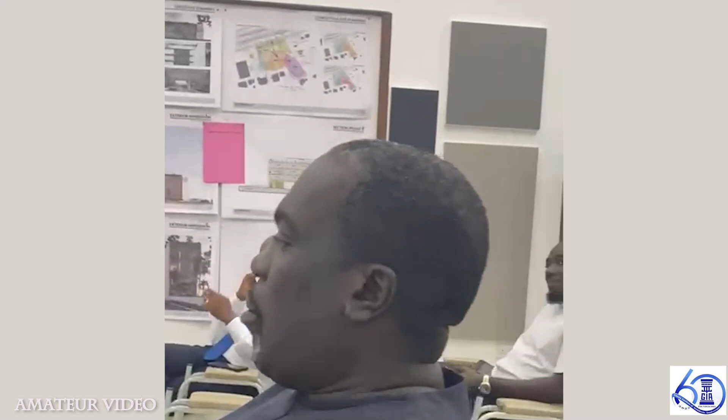Okay, so without much ado, we all know the reason why we are here. I'll call the competition coordinator to give us a brief overview or background to this competition, after which we'll go to the main object of the day. So let's welcome our competitions coordinator, Augustus Richardson.

Thank you very much, Mr. Secretary Fifi, and thank you all for making time to be here today. Indeed, it is a very proud moment as I stand in the very hall that we have all known for years, looking at what it is right now, through the efforts of so many members, and indeed all of us who contributed in one way or another to make sure this happens. So a round of applause.

I'd like to take the opportunity, maybe first of all, to say that I'm quite disappointed at the attendance as of now. I'm only going to blame it on Friday and people being busy and all that. We only knew the submissions as submission 1, 2, 3, 4, 5, 6, and 7. I say that because 9 submissions came, 2 were late. Another hallmark of what we are doing: if the time is 3 o'clock and you come at 3:01, we will not accept it. That's 3 or 4 competitions we did in my tenure.

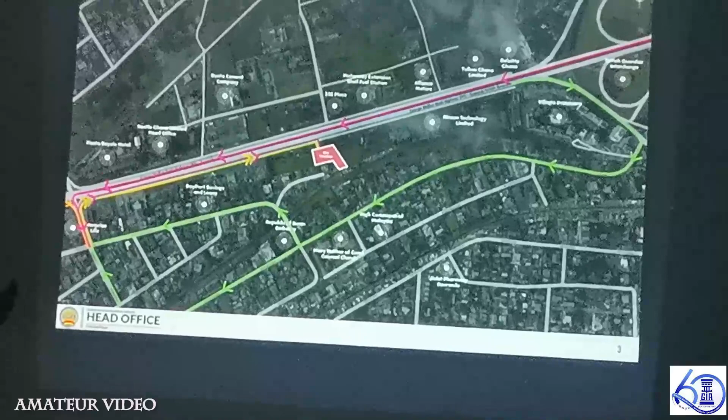And then the traffic, how to route traffic to the place. It's a whole subject for traffic impact assessment. Going forward, we need to do a study to make sure that all the properties along here can exit onto the N1 in alternative ways, because the planning needs that. I think in the permitting stage, we will have a precise plan put together for submission.

Having said that, we have deferred that thinking to another time, and this is the site and the access that comes from it. You will realize that the site slopes and brings all the rainfall down into the Jolu stream, which goes along here.

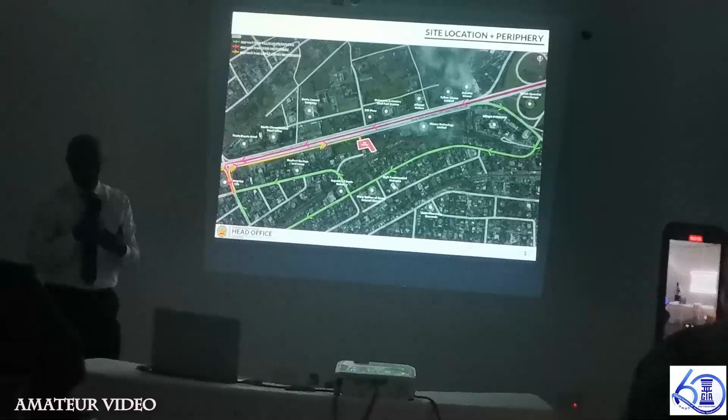So it's a very critical point about it. You will see on the client's topo study a water course that goes through there. We're very familiar with this location by Providence because we worked on 335, which is right opposite the site. That's 335 you see over there. And this whole stretch from here to here of the N1 floods seriously because of infractions in the water courses that are delivering water from the top down to the grade.

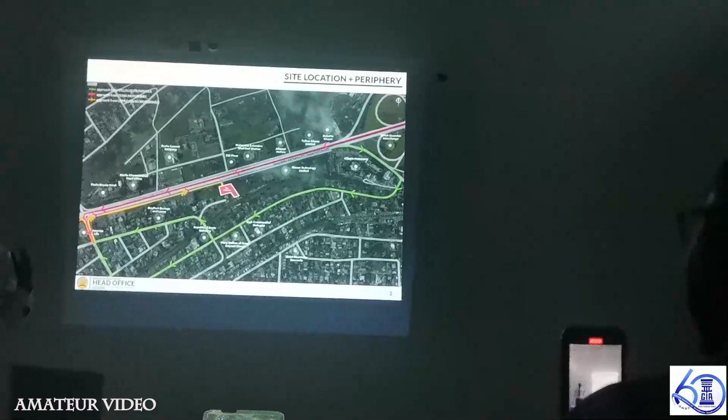So we sort of had a close-up look at this site. I think the president himself did a scheme for this site, also understands the terrain or not. Yeah, so it's not an easy site to get right. Apart from that, the client's requirement to have a phase 1 and phase 2 merging together into something was also something that brought us difficulties. So it's not an easy site.

Very close up to it. There are some sketches that give you a sense of how we intend to do this. My team struggled with how to get this thing done, and then I had to come in and say, this is the way it's going to go.

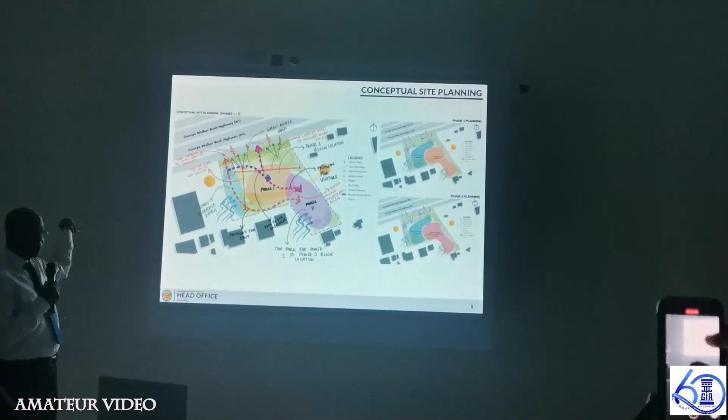And that's how we came back and saw the logic in the phase 1 and phase 2 and pathways and all these things. I don't want to go through them too much, but we understand that we have a north-facing advantage, so you can have some glass there, you can change the zone, and then the east and west. In every situation, sometimes you don't get so lucky. 335 was the same, it had a south facade, and so you have a good road coming on N1 and all that.

So all these advantages and disadvantages as well informed the way we were supposed to go about this. I'll just run through.

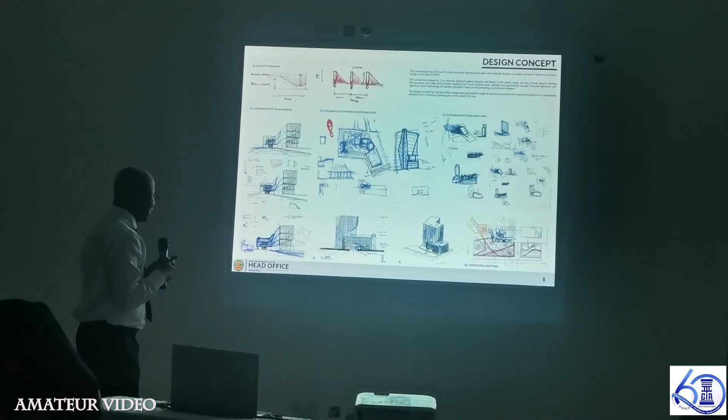There are these sketches. When questions come up, I'll leave members of my team to make comments on this. But they are conceptual, and they lead us to the shape of the building, to how the curve which symbolizes the play between your physical strength and your financial strength came about - a great idea from one of my colleagues, Okobi, who came and talked about this, which informed the curve that you see on the side. They know I like curves on the sides, and if you're going to pick this thing up, I put a curve on the side many times.

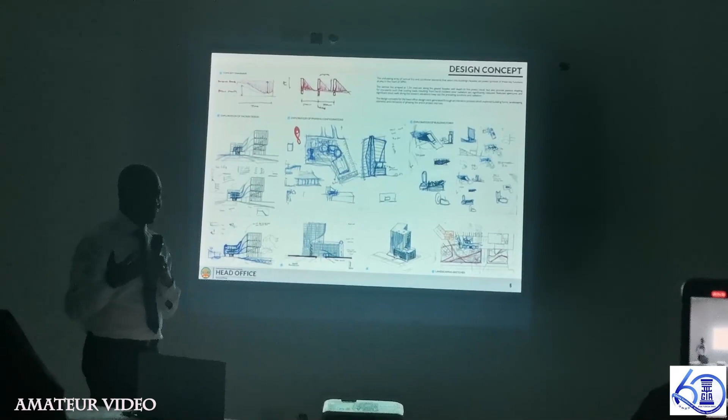So they will talk about that. But it was developed and had a strength to remind people of pensions - the idea that you must always be thinking of pensions when you have strength, and putting money away so that you can have financial strength in the future.

This was really the difficult part of the scheme: how to build phase 1 and get the cores of both buildings to merge, and then get a tower out of it for commercial purposes. But the sketches here are there for you to see. As you look at it, you'll see that you needed to give phase 1 a certain length of facade, so it informs the shape that we have there.

If you look at this here, it informs that shape. And then there's a parking lot there, which has the advantage of climbing the tower from there and merging the core, and getting traffic onto the parking levels, and being able to get basement access.

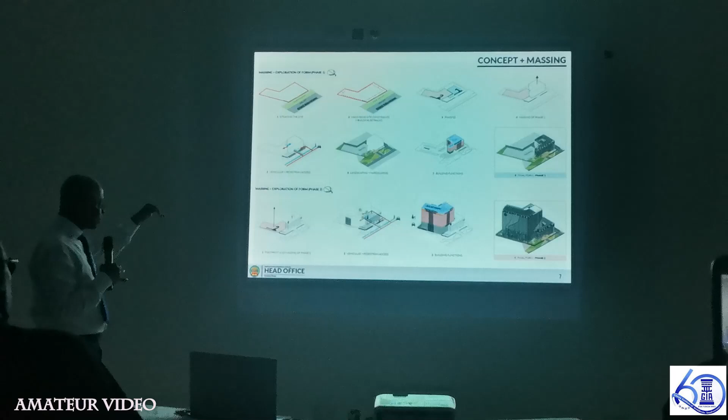All these factors have to come together to bring a solution that works. They are very, very sensitive. And then the core design itself.

I have seen some very bad cores designed, and it's at the heart of any office building, any multi-story building. You've got to get this right from the very get-go, making sure that the vertical transport is adequate, the vertical services, staircase pressurization, power.

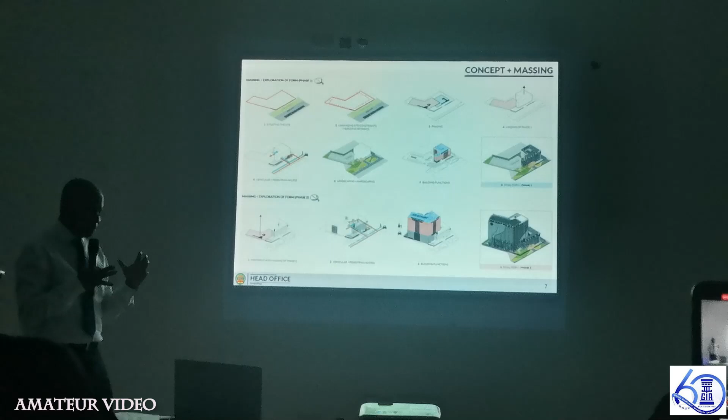Refrigerant, condensation, all that fits into the core. And then getting the core to be as accessible and out of the way, such that you harvest daylight for tasks. So ideally the core must be in the heart, and then you put people in the daylight areas, and try to catch all four sides.

Except for phase one, where we know we're going to attach, so we're looking at it from that. So these are the points that informed the site. And so this is what came up.

Phase one then stretches that way to give certain latitude to the project. So if it takes them 5-10 years, they still have a stately building which fronts N1. We needed to be careful about the easements, especially on the front.

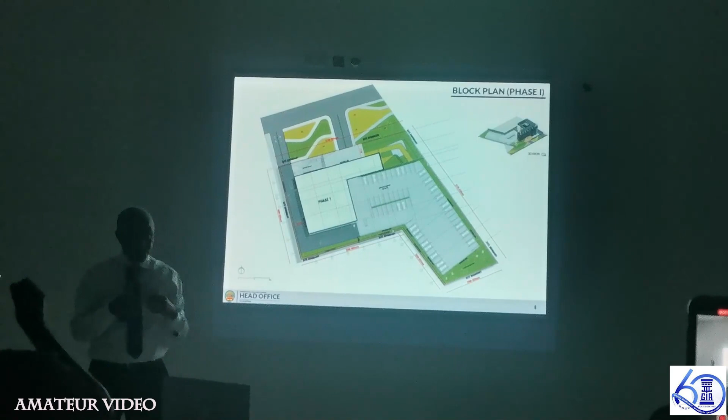There's frontal access and exit, and it goes through, and you have parking for phase one. You also have basement access, and phase one is good. Then you kind of realize about parking 5 years, 10 years from now, it goes up at the top. And it works very well.

And you merge the cores, and you merge the receptions, and so on. It works very well that way. But not an easy thing to put together, because the brief is very, very challenging, and the shape of the very site itself.

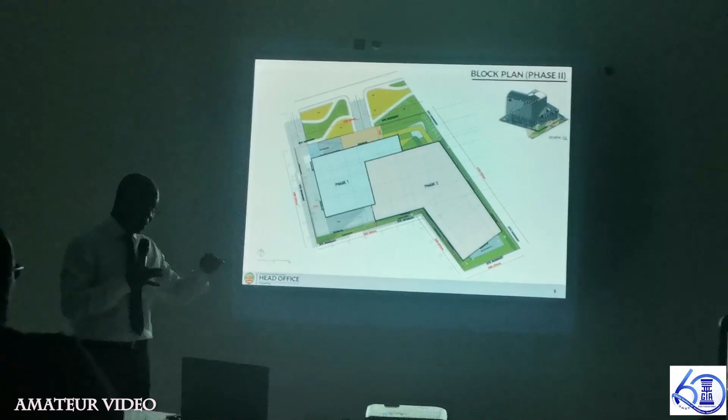And so one of the things that is most important is getting the structured parking, the ramps to go around the core, and sort of rhyming that with the entrances.

At every level, as you spiral, you must hit certain door levels at a certain location. So when you go to section, you know that at this level you're entering the core, at this level you're entering the core. So all that, of course, further refining will go on.

So that level, this is the basement, phase 1's basement. You come in, they will have the usual cells. Those are shuttle lifts that take you from the basement to the ground floor.

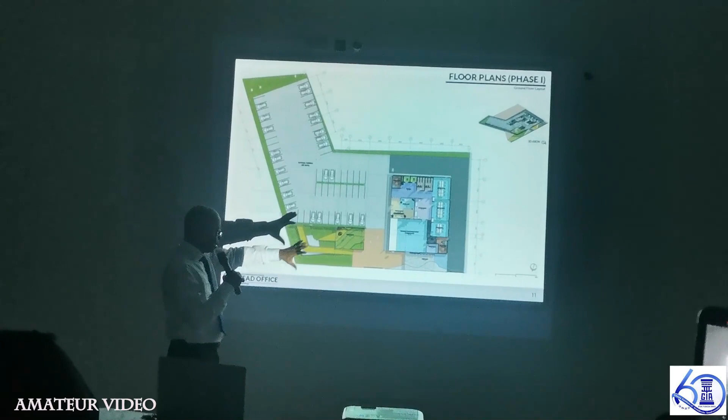And then following up, phase one looks very simple. It has a good reception there. It has a core, wet services, a staircase area.

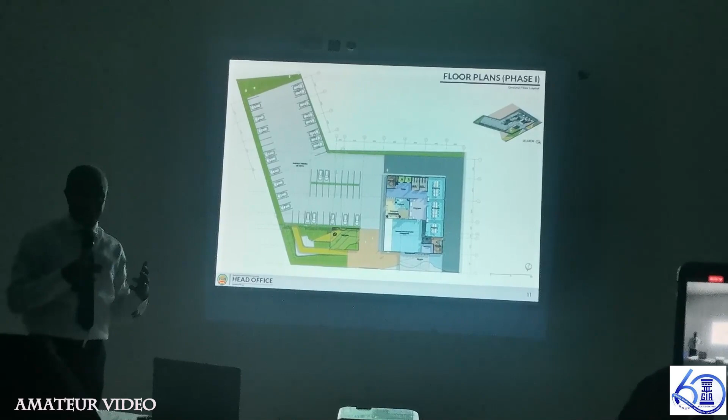Having said that, after a competition, there's always a re-engagement, and you basically start to redesign the problem, even though the concepts stay. So all this will form the beginning as the basis of further design. It might stay, it might not. So you've got the ground floor, the access here.

We've got an entrance garden here, which is very important for me to set the mind of the entrance to a very soft and quiet, and then there's a parking on that side. All the spaces I talked about.

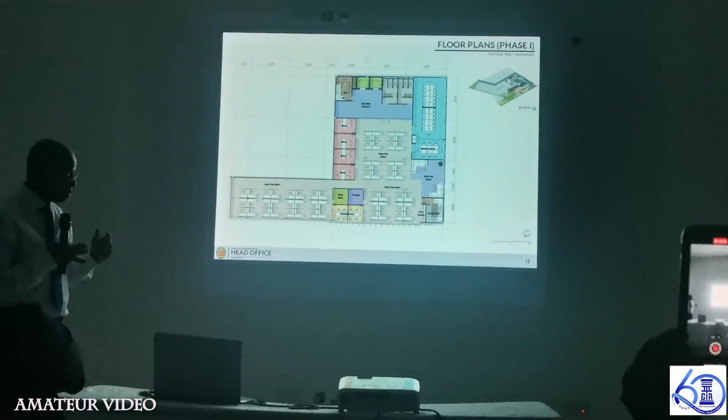Then you get to the proper floors themselves. In office design in this country, there is always a toss-up between the cellular office and the open plan office. While out there, outside of this country, in the developed world, people are moving away from cellular offices, and there's a whole trend.

I've actually designed offices in the Tigo office building, where at the end of it, the CEO took his office and said, take it away, I want to sit with my people. And we have done a very elaborate office with him. So that trend, corporate worldwide, is more open plan, interactive space, collaborative space, and so on.

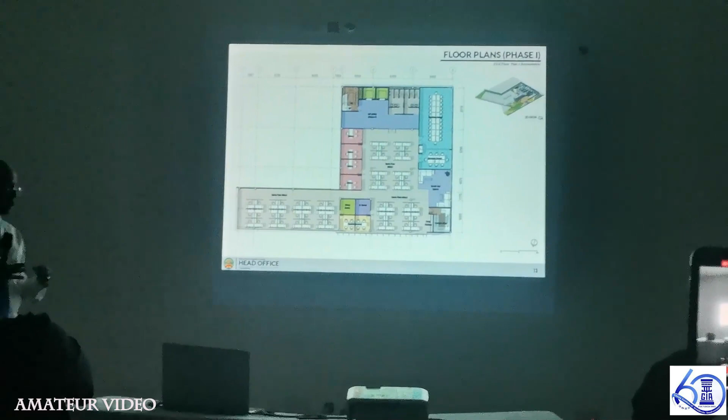When you come here, people are very sensitive, especially in public services and so on. People are very territorial and hierarchical and so on. So in our re-engagement in most of these offices, we need to tease out and also educate them the value of it. So what we have done here is a fair split between cellular offices and open plan offices, which we are going to.

We started a space planning interview process where we field a questionnaire survey to them and fill it out. We study the organogram, we interact from department to department and make sure that they feel that the building is theirs. We get the questionnaires back, input into a revised stage 2 design, and go back and interact with them. By the end of the process, they checked out on everything and they're happy to go ahead and work with that. We may end up with this balance of cellular offices and, from our experience in the past, open plan offices.

So that's phase 1. Similarly, over here we concentrated on more cellular options, but some open plan, looking at the balance in how we're going to go forward. But this will clearly be validated by the re-engagement we're going to do.

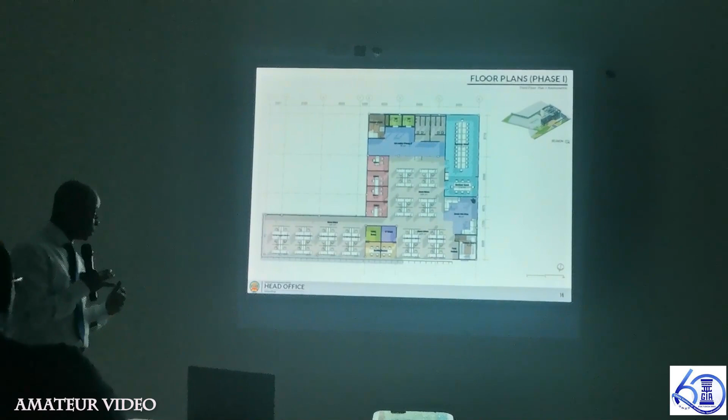So you've got these floors and then you go to the roof where there are these services. We're going to test the extent to which these services, these facilities, are going to be sampled by them. There's a gym, there's the catering, cafeteria section, all those services that are in the brief, but as you design, you want them to recommit and look at the resizing of it properly. So as it looks now, it looks great for their needs, but we're going to test that with pure interaction and sign off before we go into documentation for tender.

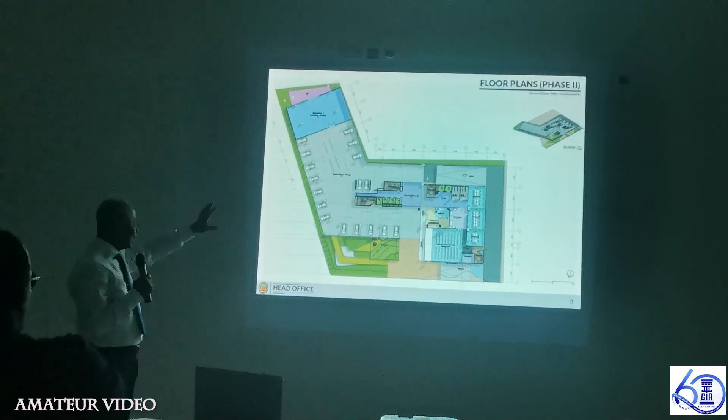So I think by and large we have phase 1 covered. Now we're looking at phase 2, where we have cannibalized the parking lot and put a tower there. It has the ground floor. There is no basement under the tower.

You've got to think structurally about how you put a tower next to a current building. If we had done the tower before the smaller building, that wouldn't be a problem. But now we're doing the smaller building and we're going to go deeper in foundations, and those discussions we had structurally were about how to extend columns, setbacks, and so on. So all that we have done here takes into account that interfacing when the time comes for that to go on.

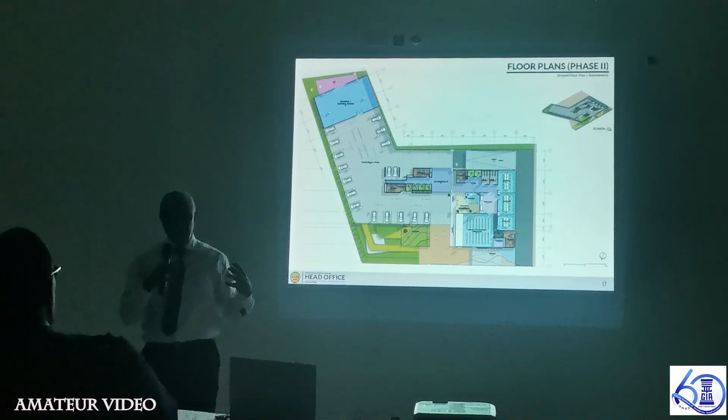So you have a very important part of the tower, which is the core, which relates to this core. This link there is very important—how we merge two links and get the reception to merge them. So on this you have the parking, you've got the core, and then you start to travel up by going.

There's a ramp that takes you up onto the upper floors for the parking. So the next floor here is the parking level. You keep going up. This is the first floor plan as well—it's parking. The important thing is this ramping that makes sure this is parking on a slope, a trick that we use and it works.

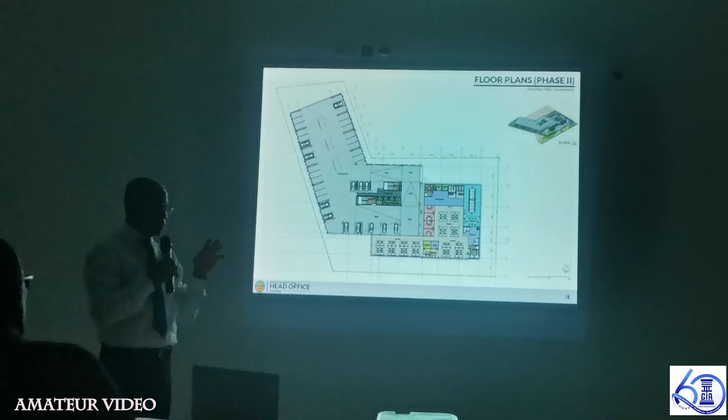The core design is important—the staircase pressurization, these spaces that are for fire protection, to make sure that smoke doesn't enter the staircases if there is a fire, so people can escape. To me, the biggest test of any office building's success is the core design, and all your engineers will weigh into it and make sure that it works before you move ahead on the next step. So that is the core that we stand by in all its aspects.

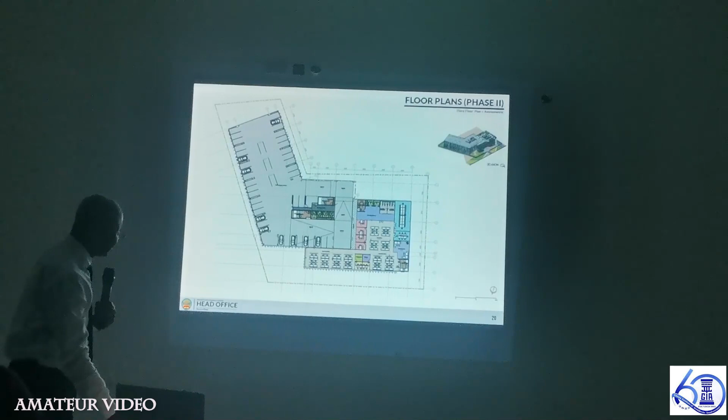It works very well. So you've got the parking levels until you get to the office level. It keeps going—this is the third floor. Then we get to the office, typical office. So this is the fourth floor, and then the fifth floor, the office starts: open plan, typical office floor, open plan with a core.

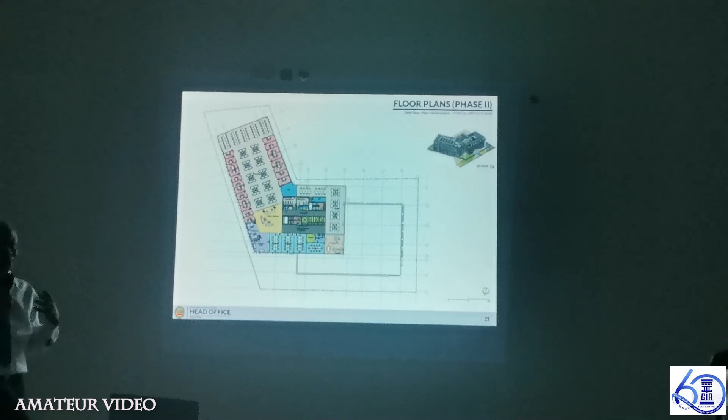Now you need to look at how we do a typical space planning of it. This layout is doing the counter thing, which is putting the cellular offices on the windows side so that the big men, or those who have the right for cellular offices, can have them there.

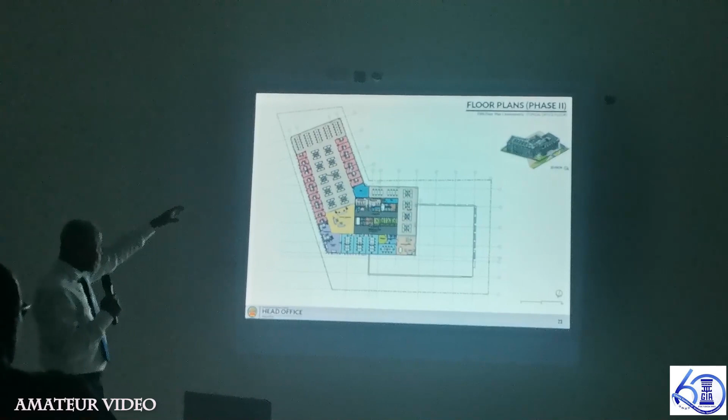Typically, what we do is try to put the shop floor guys near the windows, create very nice layouts for them, and then put the cellular offices around the core. The shape of this building is such that we have a very long length of windows, so you can have lots of cellular offices on the windows and still have open plan offices with meeting rooms that also have the joy of daylighting. This is just one typical way.

We're going to test these layouts, and we're going to work with the organogram and make sure that every department is happy with the location and the layout, the space planning that they have. So that process is what we're validating. We simply put this typical layout there for...

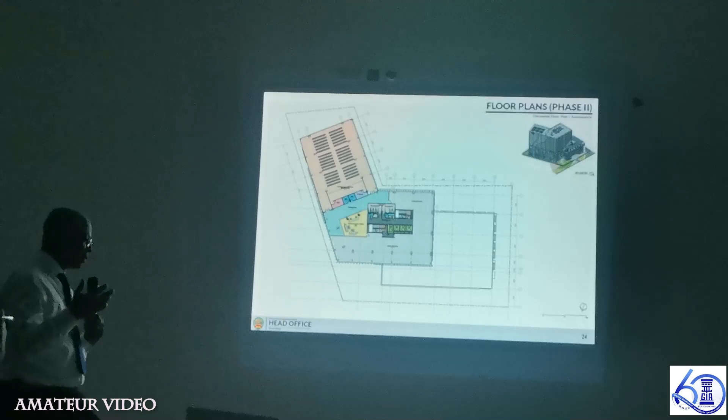...to illustrate the density, the occupancy density, which is about 8.1 persons per square meter - sorry, 8.1 square meters per person, which relates to the total floor area that we have, and then it runs into the budgets. So the top floor, we have the auditorium, training facilities, etc.

And then we have the services. You've got to leave plant space. Plant space on the top, cafeteria. Sorry, the level below has...

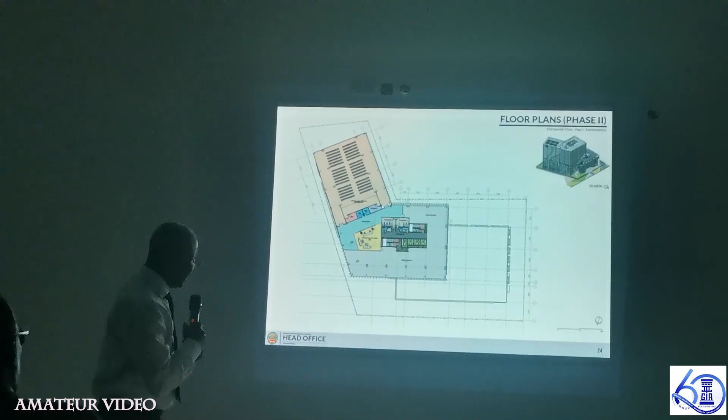Go back. This is also open plan seating offices, possibility for multifunctional use. Then moving up from this is where you have the cafeteria. The cafeteria leaves room for services, and then tries to look out on the N1 and the open areas there.

And then you go to the gym. This is an oversized gym. We're going to test it and make sure that they are happy to have a size of the gym like this when the time comes.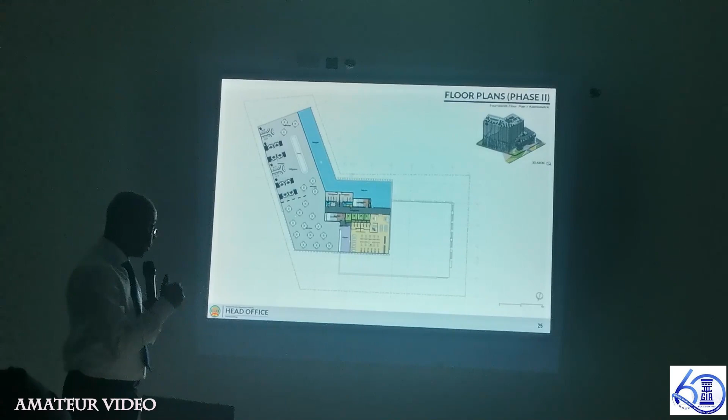But in the end, being a commercial property, this is probably going to have the dictates of the commercial market, and so the brief for this will not necessarily be NPRA's brief, it will be what the market will require. If NPRA grows, it will only go into a small part of the tower.

So here we are with some sections through phase two. I haven't talked about the roof that comes over the cafeteria levels - that's where you have the solar panels. You've got an entire roof with the PVs, and that's what's over the cafeteria.

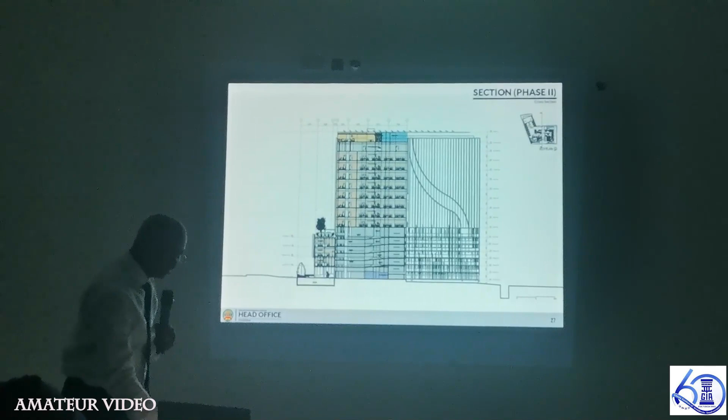Sections through the tower. I think I'm coming to the close of my presentation. You've got a sectional perspective that gives you a sense of how phase one looks like. One of the things we do is to give you a key plan there which orients it. If you have time and you look at the drawings, it helps you very quickly to orient yourself.

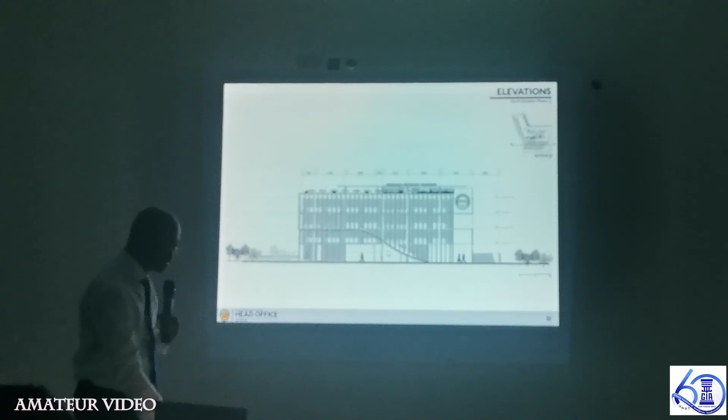And so, elevations - the curve keeps appearing, reminding you of financial stability in relation to physical stability, financial strength in relation to physical strength. The curve which reminds you of your pensions. And so these are various elevations.

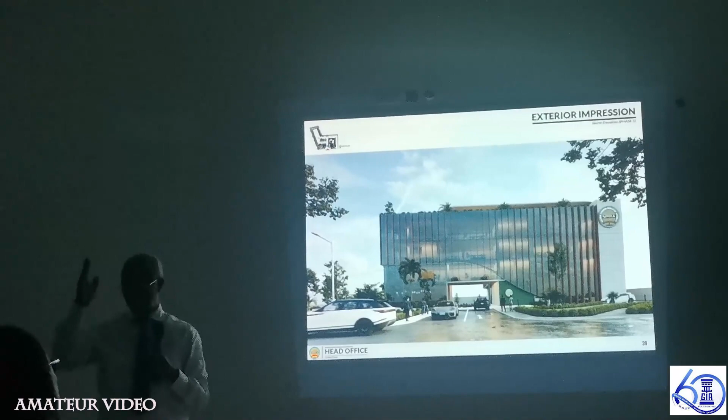So, I think I've spoken enough. I would like my team to very quickly - 5 minutes. The gentleman must have been in the next one. So we'll start, talk a bit about conceptual aspects, anything I've left out. And then Julius, who joined Multicad just this year, is doing very well, and he's going to do the interiors because he did very good work on the interiors. With good guidance, he's got a very good soft touch to this. So we'll go over to you. Come on.

Good evening, everyone. So I'll be very brief but succinct. I think Mr. has said pretty much all of it, but what I can add is one of the key considerations we had was shading.

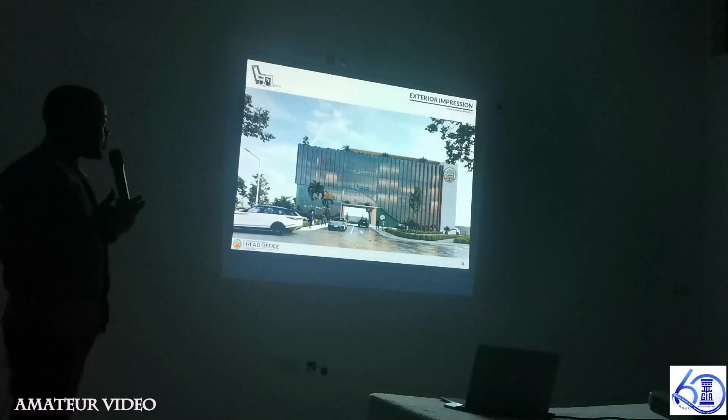We know the issues we have with the heat in our offices, especially because of where we're located in NPRA. So one of the strategies we employed was the use of vertical shading, and these were strategically positioned, especially at the eastern facade and also the west, to help shield from the sunlight and solar ingress that comes into the office throughout the day.

So the visuals, as you've seen, also try to orient the viewers as to how phase 1 and phase 2 integrate with each other. As you saw before, it was just phase 1, and now we see phase 2 behind. And this is a view from further back, showing phase 1 and phase 2 together.

This is a view from the northwest, and from the northeast.

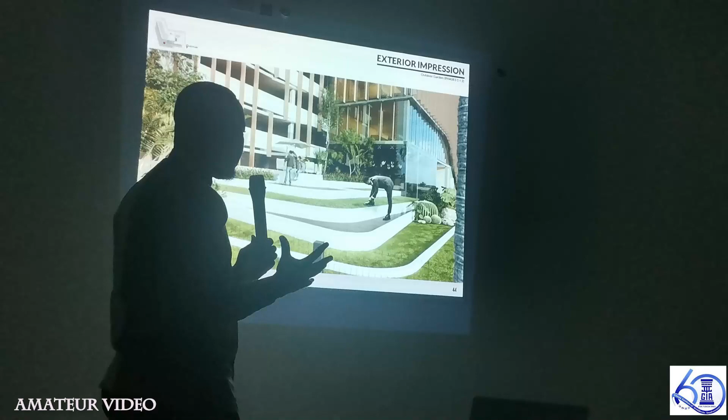And this is just capturing the landscaping that we have upon entry, as Mr. Ifod mentioned, just to create the ambience for the users and also for visitors. This is a close-up of the interior, the outdoor garden upon entry.

And I think I'll let Julius quickly talk about the interiors, and then we'll quickly move to the regional head office.

Thank you. Good evening. So for the interior spaces, basically the idea was that we'll maintain the story we're telling on the exterior space. So with the curves and the graph, we wanted that to be throughout the interior space.

We decided to also settle for neutral colors that would calm down the nerves of whoever is coming, especially because pensioners obviously are stressed enough about their money. The idea that they can come to a space where they are sure that their money is going to be taken care of, and to be in a space that relaxes them, already gives them the mentality that this is a firm or company we can actually entrust our money into. So that's basically the idea.

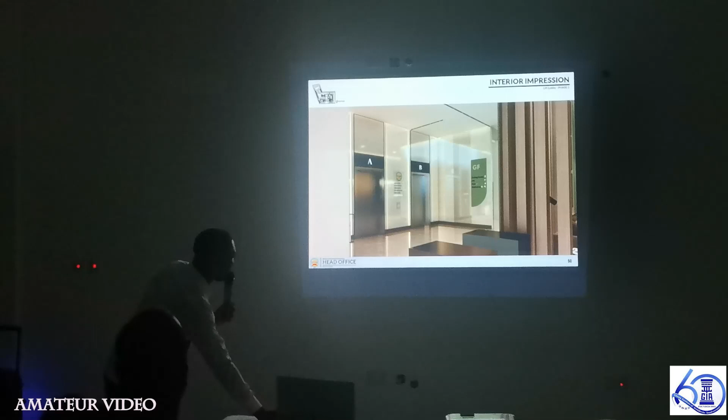So for the lift lobby, we're also looking at very light, very gentle colors, not too harsh, but that are appealing as well. Neutrality as well.

This was the prototypical office block for the NPRA, and they intend to have one of each in all the regions across the country.

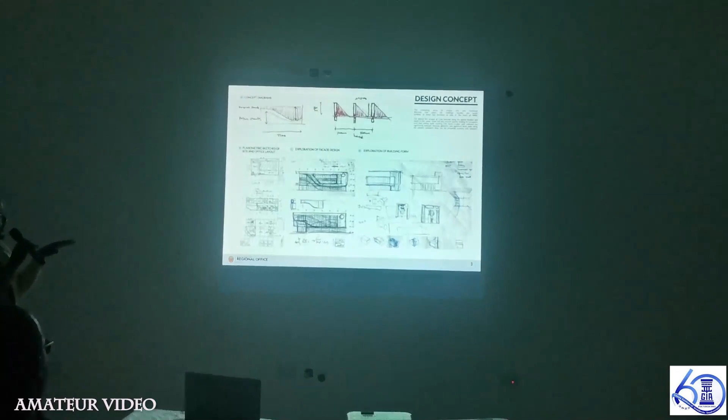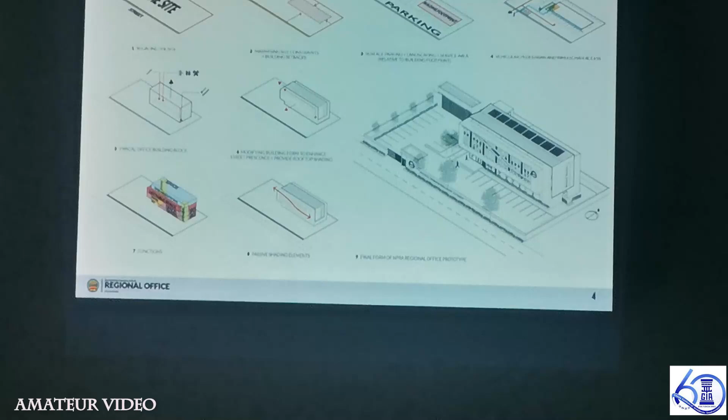So these basically capture the conceptual massing behind the building. As you can see at the top, we basically plan out how the site will be organized, a service area where the office will be located, identifying the different accesses. So that's on the top right.

So we have identification of the different accesses for wheelchair, PWDs, people with disabilities, for pedestrians and also for vehicles. And then we have an office, typical office block, which we basically extrude, and then the various design elements come in to form the rest.

So we have the roof that frames or covers the rooftop, which is actually one of the potential revenue generators for the office, for this regional office, which was also part of the requirements. And then we have a function to capture the bottom left as well.

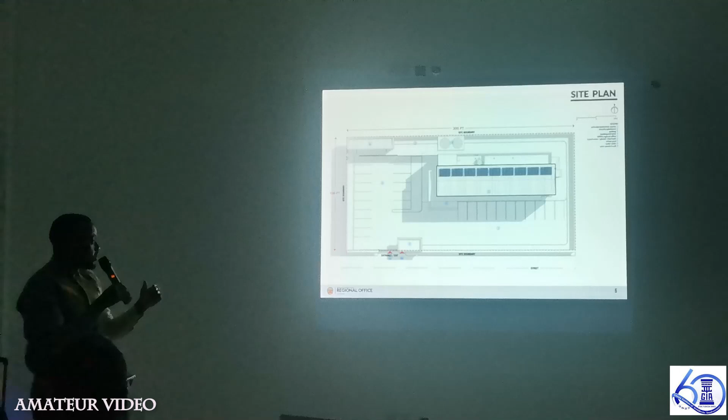So one key thing is that the building is oriented with the longer side facing north-south, so that we were able to harness as much daylight throughout the day for the office spaces. And on the south facade where we had a lot of glazing, we employed the use of vertical shades to keep out a significant amount of solar ingress.

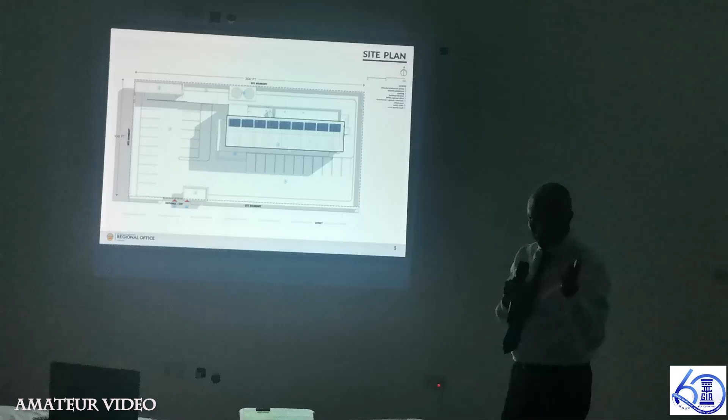Yeah, so this is no site constraints, the ideal situation. There will clearly be sites that we have to do a lot in order to make the concept spoken of already work.

This is the west facade with adequate cantilevers for shading as well. This is the east facade.

And then this is a sectional perspective just to give a sense of the building in section. We can see the double height section at the bottom left, the level space above that, and then the rooftop space also. Another sectional perspective.

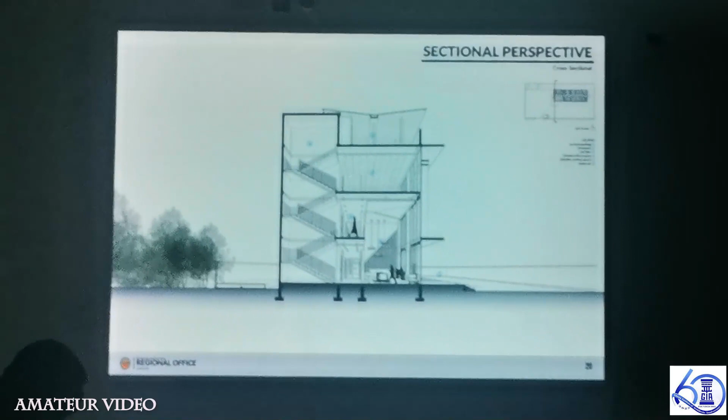Basically, the idea is to create a design, or a visualization that wasn't so imposing on the viewer, has soft touches so that it's not overwhelming, let me say. But in that simplicity, the attention to detail as well would bring out its beauty, its aesthetic.

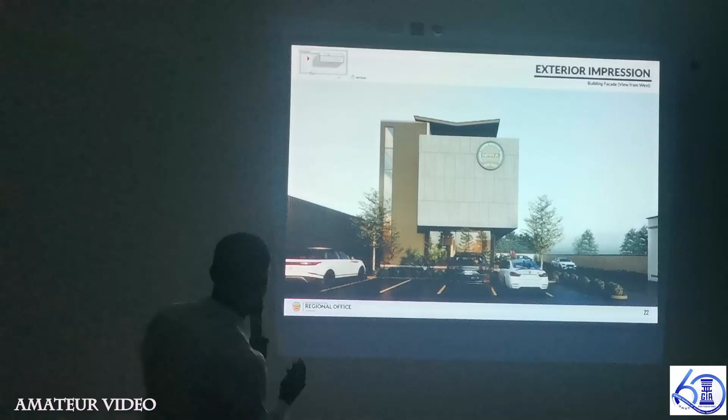So then we can see, we can appreciate the glass glazing, basically how effectively the shading is working. So then this is the other facade, basically, with a shot of parking spaces and landscaping.

And then the shots from the southeastern side, southeastern vista. And then from the southwestern side.

And then we have an aerial. We also wanted to obviously harness the potential of the sun, so then we decided to have solar panels. So then another aerial.

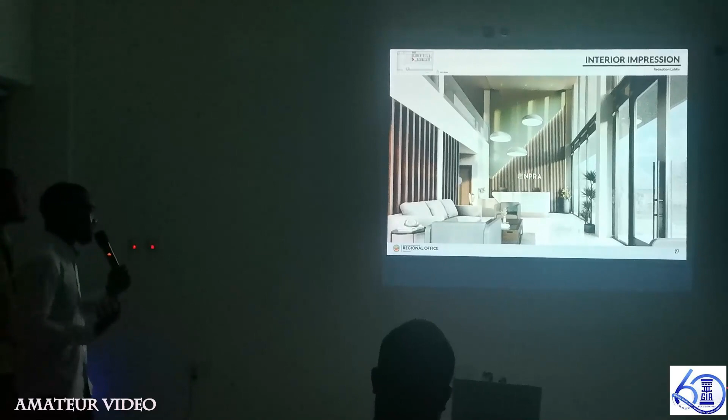We have a lot of daylight in the space. So the volume of the space and lighting creates a sort of an uplifting feeling when you enter the space, and that's exactly what we're going for.

So then we have a shot facing the entryway. And this is a shot from the top, so on the first floor, looking down at the reception area. And then now the manager's office.

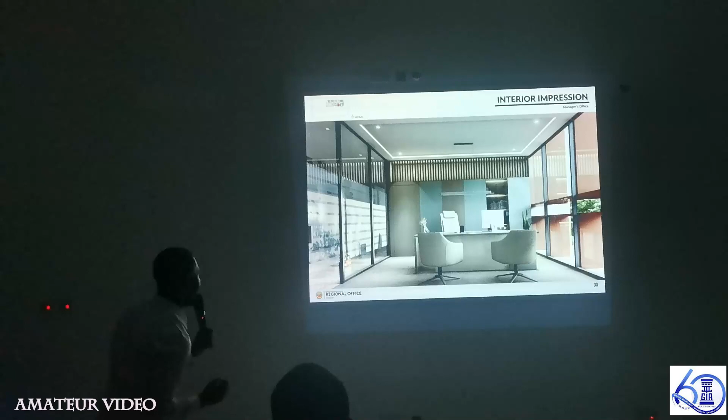The manager's office, we still maintain soft subtle colors. You can see our shading elements there and how our shading is blocking out a lot of heat and sun, but still keeping it as illuminated as possible. And then the view in the manager's office facing the seating area.

And sort of an aerial of the manager's office. Another shot facing the seating. Yeah, and that's it. Thank you very much.

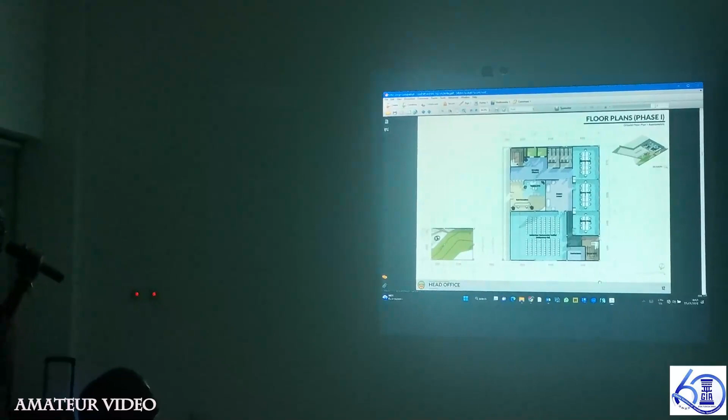In the presentation, I was trying to say that the location of the core - you have a building which in phase one is an L shape, and then the core is located at one end of the L. So it brings us a lot of circulation.

If you go to the next floor plan, you realize that everybody else on this arm of the L, we are having to introduce a long corridor walkway - even though by your open plan it doesn't make it obviously a walkway, but it is a walkway - to have to go all the way to where our stairs and lifts will be. So yes, I rightfully say that the design of a core, if you get it right, is the major part of an office design.

The flow in the core itself, I love it. Its position vis-a-vis the rest of the floor plan, I find that it brings us into a lot of circulation. To everybody else down there, yes, you could use the escape stair to your bottom right corner, but there's no lift provision there.

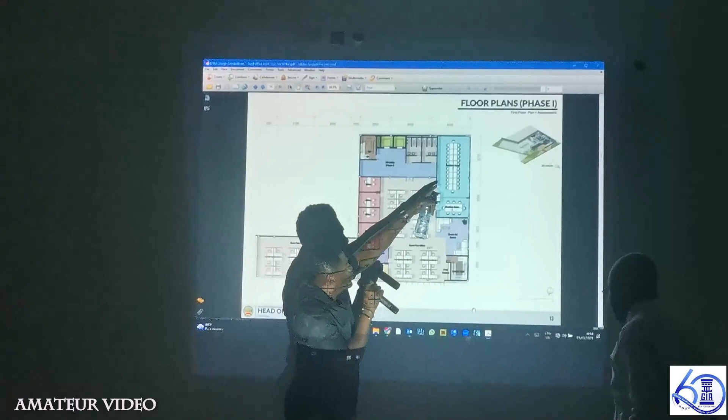And then the circulation space in front of the stair and lift, the proportion of it carried on each floor - if you look at it, to either end of that circulation space is leading nowhere, and we could have been spared space. I'm looking at, let's say, towards here or towards here. So it's like a huge circulation space carried on each floor. The design of the washroom, for me, in office design, robs us of any daylight, even though we are on a perimeter, because you put your ducts to the outer perimeter.

So I would have thought that if we reworked so that the washrooms have their duct internally, then on each washroom floor you could have also gained daylight into the space. But because of the way it's worked out, your duct is your perimeter wall, so no daylight, or not much daylight, could possibly be coming in.

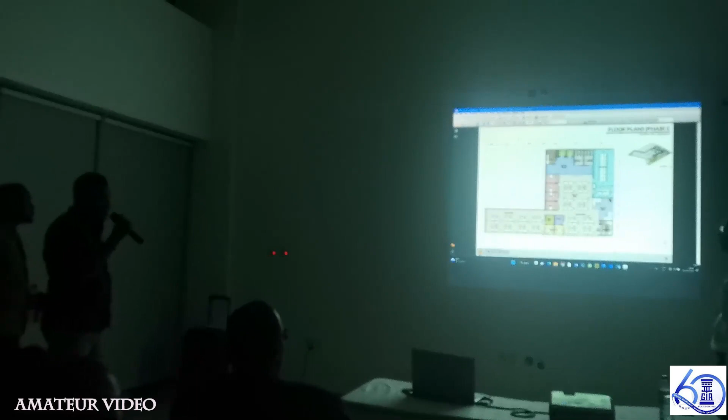Okay, then possibly on each floor as well, could there have been a kitchenette of a sort, knowing how our food habits are on each floor? This is a 3-story, okay, with the cafeteria sitting at the top. But let me answer the other, or maybe I go through.

So on this floor plan, it was mainly for me the circulation and then the location of the core vis-a-vis the rest of the floor. But if as phase 2 starts coming in, I kind of think that yes. Okay, the one before this, the floor plan just before this. No, okay, maybe it's that one.

So what I feel is phase 2, especially this part of phase 2, if you look at, is this your ground floor? Yes, the ground floor, and then the subsequent floors. I think the determination of this span is very effective on the office floors, but I find it wasteful on the parking floors, because it suddenly gives you a very huge space where nothing can be done there.

So it's very possible that what could have been done is, on your lower floors where it was being used for parking, the sizing of that width ought to have been optimal for parking—so if it's a car, 6 meters, if it's circulation, 7 meters or whatever, another car, that ought to have been the decision to size it. Then when you get to the upper floors, you open out to optimize office space, but on the floor plans used as car park, it's certainly not optimal, and there's a lot of space there that could have been done a little better.

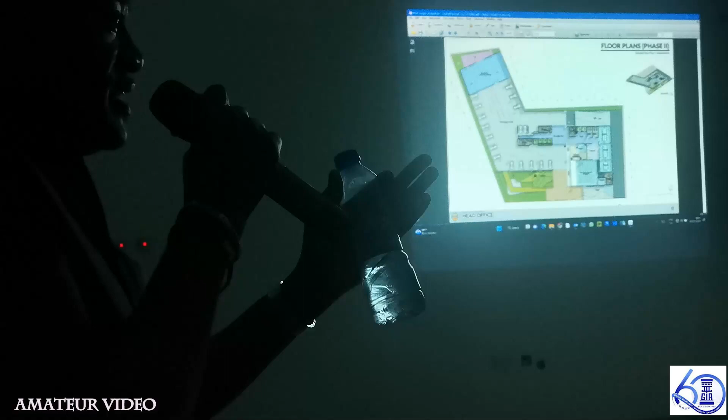Still on phase 2, the elevation—I find it a very exciting elevation. I'm just thinking that for where it is in Dzorwulu, or that part of town, maybe signage and things that could have been seen from many places could have been very helpful. I see there's the attempt at signage on phase 1, which is fine, but given the height you gain when phase 2 comes, I think it gives a brilliant opportunity for the skyline to have something of a signage in there.

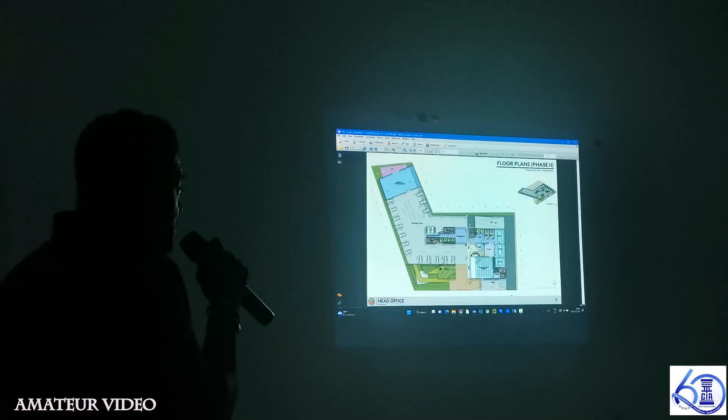I think this will be my comments basically, but let me say I'm very excited with the presentation. I've looked at some of the other presentations, even sheet sizing, the consistency of it and all of that—very nicely put together. Rendering quality, as I said, quality of floor plans is something I take note of, because even from my office, sometimes we get very exciting elevations, but the floor plans don't have excitement. But all your floor plans with the furniture and the kind of renderings seem to be really exciting. So congratulations once again.

What you have commented, I've taken some notes. You will realize that in a design of this shape of site, there are trade-offs. The grid—in any multi-story project you start with a grid, and for certain economic reasons at the top, you maintain the same grid downstairs. So there are these trade-offs that inform your design as you develop, and they come to you as you go on, and you trade off.

As we go further into design, when costs come up, perhaps we'll look at whether there are any other ways of mitigating some of these observations. Now, the linking of the cores drives the position of that phase one core there, and it's a trade-off. We took clear travel distances into account.

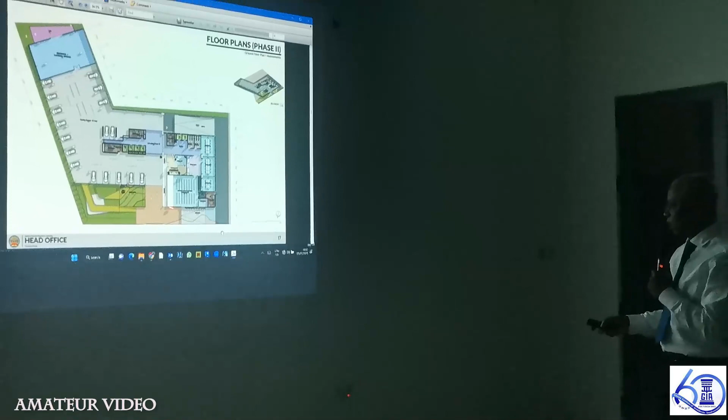Oh okay, all right, that's great. Thanks. We took travel distance relationships to be able to do this configuration. Yes, it might seem like a long walk, but if you look at the travel distance, it's actually a small building, really.

Perhaps something will come out with that. President, I forgot one thing. It's about the floor-to-floor height. The sections, can we see the section?

I kind of thought I saw something on that. No problem. Maybe the sectional elevation, yeah, the sectional elevation. The sectional perspective, any of them. Oh okay, not the sectional perspective, the sectional elevation. The section, the section is off. That's it, yeah, this one, or any of them. What's the floor to floor?

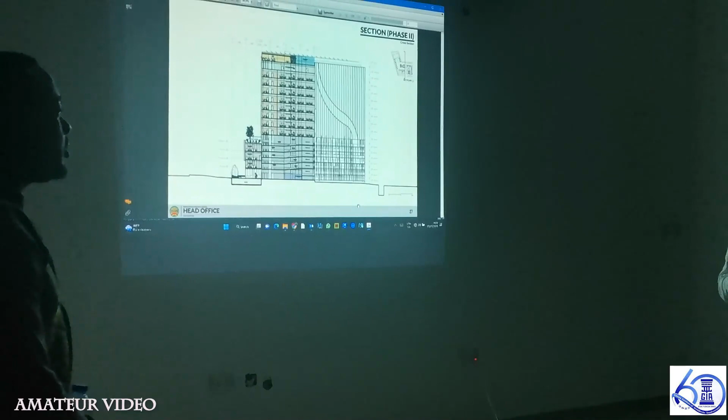Ground floor is about 4.2, and then the other floors are, what, 3.9. Is it floor to floor, 3.9? Okay.

We always work within that range because we have raised access floors. So this section is taking the levels for the parking. The parking is 2.85, smaller. Okay, so that was the question.

So in the parking, because when I look at phase 2, it seems tied floor to phase 1. The parking, don't forget, is a spiral parking, so it runs along it. The only time it coincides with phase 1 is when the cores merge. And the travel of the parking is on its own trajectory because of the spiral.

I was just very curious, because I thought that if we're doing a 3-point-something, which is fine for office, but then gives you suddenly too long a ramp for... that's different.

Okay, then the other comment about the restroom areas, and Oku came to me well after the competition and said we need to look at the handicapped situation. Moving into design, we're looking at all these things, and we've taken some notes. We'll ensure that these things come up.

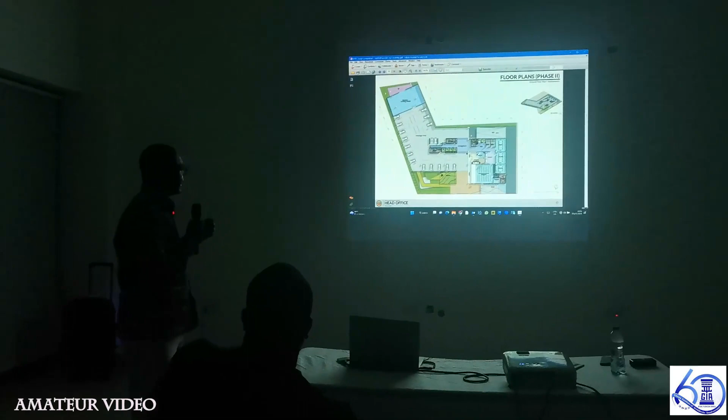Great work, but let me ask, if you can go to the second floor, wherever you have the cellular packages for phase 2. Okay, all right, okay. Well, I don't know the time, but I think that having all these cellular offices here and those here...

And having these cellular offices here and there blocks the natural light that comes in. And the fit-out, if you go to our fit-out, we've done it now, you realize that the principle we do all the time is that all those walls are glazed walls, and you filter light into the corridors, so there is a certain level of daylighting that gets into this open plan space.

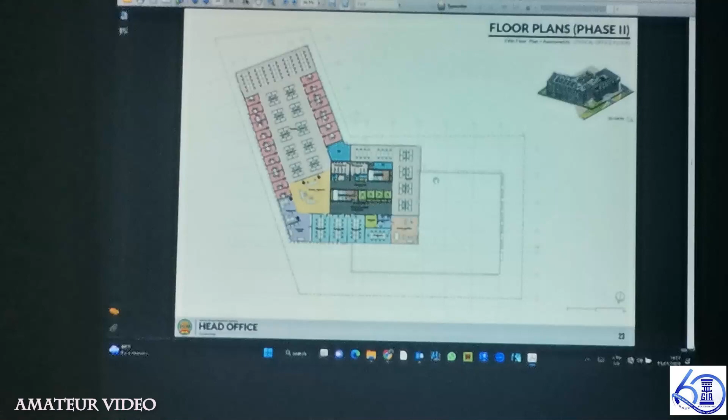Okay, so I was thinking, that is fine, but in addition, is it possible to throw in light wells from the rooftop, so that wherever you have this... because if it is going to filter through this, by the time it gets here, it is reduced. If it's going to filter through this, by the time it gets here, it is reduced. There will be some supplementary.

The light will take up a certain volume of space that will kill the occupancy level targets that you want to have. And maybe not a wall like a column-like wall, but...

To have glass block on the floors. So you chop it like that, and then from the top it comes - you have your skylight on top, and then it filters through. It's an idea to try. There's a software we use in Revit, when we cut out the building to show light into it.

We would use that to sense that a light well in this location might bring a certain level of lighting. But having said that, my concern is how the planning, the space planning, the furniture, and so on - once you take a shaft through it. So it wouldn't be a shaft.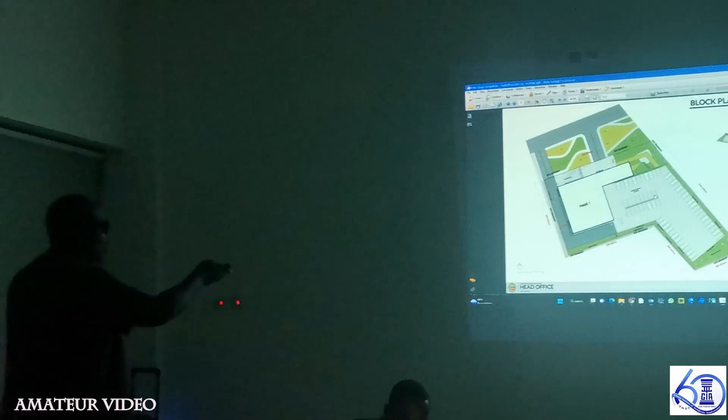We realized that, like you said, President Foster had said he worked on this site before, and what was remarkable about the site was that it didn't pond when it rained. I was like, that's interesting. So as we walked the site, we realized there's actually, currently on site, a huge drain built by, I don't know whether it's government, but infrastructure built all the way to carry water from that side all the way to the drain at the back. That drain at the back is going nowhere - this is a natural course that runs even underneath the Bellagio and so on.

So we picked that out, and I must say I think this and another scheme were the only ones that remembered this was there. In this design, we proposed that the 1 meter deep culvert be redesigned closer to the wall so that you can gain space, but still kept it there. In other designs, the competitors took that drain out altogether, which is crazy, because actually the drain is underneath the road, carries water from the north and ponds on that side. So the response to the site itself was wrong.

Number two, what you also find is that a lot of these competitions request geotech reports. The geotech report tells you that on this section - and this is what I found genius about this - there was basement parking kept purely in front, if you look at it, but there was no basement parking left there. Why? Because they did a number of trial pits on this side, and the trial pits tell you that as you get here, the varying water levels are 1.5 meters, and 3 to 3.5 in the front.

So in some of the competitions, people are actually now suggesting 3-level basement parking, which was shocking to say. Did you really read what it is? And again, what you also find with this, for me, was just ingenious, because you have to read the brief to appreciate what they did. The client made very clear that phase 1 would come now, and they didn't even know when phase 2 would come, and that they were going to wait to do phase 2.

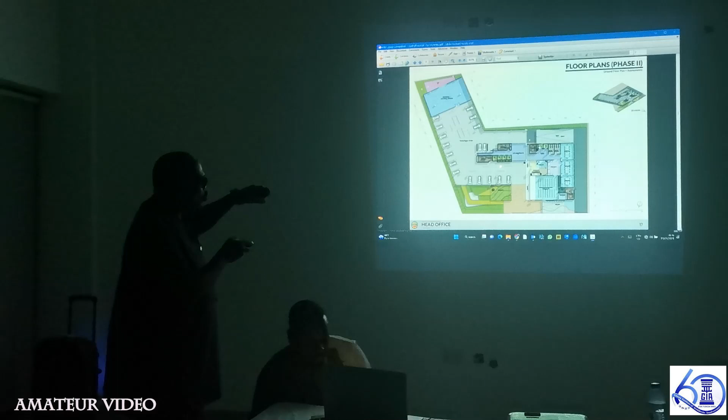But when you look at phase 2, and now you see it here, go to the parking level. Right, now again for me, the question of the distances to staircase, it all seems central here. Nobody will have problems coming from this side, but I felt like, from a distance point of view, they didn't meet the fire requirement expectation.

You could see what the sense was, that there was going to be a point in the middle. It may spread or whatever it is, but it's very clear that it's in the middle and then you have the rest of it happen. But this distance, if you know, it's like the SU tower where you don't have a core, a hard one, but you've got a wing and a wing and a core. Yes, so I need to check or get him to do the study.

Yes, I think, unless I'm wrong, and this is what I was just trying to find out - I understand from the core to where the last person is, it's like 18 meters or so. And if you look at it, this is more than 18 meters. So just a thought, eventually when you detail. I'm sure there's a process to do that, so I'm sure that will happen.

Again, please also go to the interiors. This is where I commend your interior team for the work that you did. In this building, the client had asked questions about branding. They have a branding team, just maybe for you to know - there's a branding officer there, I don't know if you met him. And he believed that the glass of the building should be green because the NPRA uses green. We had to explain to this guy that branding is not about color.

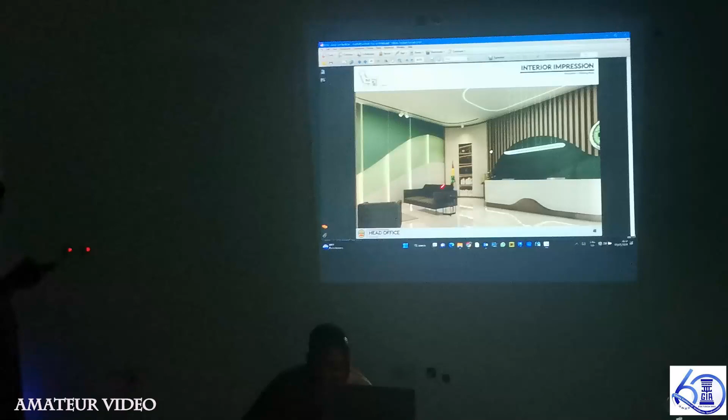Indeed, the board meant that branding is about values, and I think you captured that very well in the concept. When we showed it to them, we didn't show the whole interiors. When he sees the interiors, he will see the respect of the color, the branding, the greens and so on, which links to the subtlety of the colors and how it worked on this wall.

I love this, exactly, a lot of people carry this. So congratulations on your renders and the thoughts that went into it. The level of thought here was deep, because a lot of us just make buildings colorful, green, orange.

Absolutely, you said you didn't have a disability consideration. I think you did have it in the second tower, but not in the first. Phase 1 didn't show disability, but phase 2 does. And again, in the regional offices there was no disability consideration. So maybe that's where you need to consider those.

Also, what we found was that the ramps used here were 1 in 10. In some competitors' ramps, they were 1 in 6, or 1 in 8. This is happening in a lot of buildings locally, and it's criminal - I wish members would be here to hear it directly. It is criminal to make a 1 in 6 ramp, which is destroying people's cars. But here, clearly the ramps are all 1 in 10 and taken very seriously.

So, Mr. Hayford, we looked at the work, did thorough work to identify the process, and we must commend you for showing that they are very happy with the product. I believe that's a business matter and not on the landscape. Thank you very much, you want to use this?

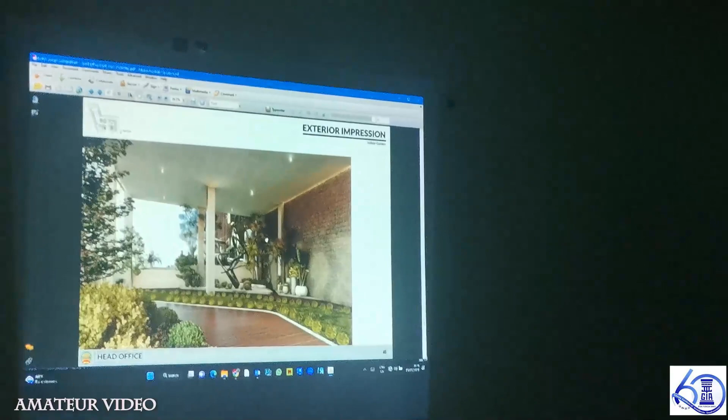So what I've observed is that it gives us an opportunity to design these columns, because though the landscaping here is beautiful, these columns take away from it. They probably don't need to be as blank as they are. It gives us an opportunity to just design these ones. I think it will be exciting because what you have here is beautiful, all of it is very beautiful, but these columns don't look as if you thought further about it.

Then there was the interior, the reception - it's something to do with oscillation, like in physics. Whilst the curves on the elevations look very beautiful because the oscillations were very shallow, this one is a little more acute. When you have oscillations like that it plays a little hard on the eye, but on the elevation, especially the one you did for the regional, it was such an elegant oscillation.

And then this light, its height is probably just about my head or something like that, so you probably need to look at all of that - there are things I fight with my staff about. So, to the regional one - the regional one's oscillation was amazing. How is the exterior? Yeah, I'm going to show it.

But in the regional, on the floor plan, I would question the location of the core. The location of the core on one end suddenly introduces a length of circulation, because, as the President was saying, in the regional a site hasn't been given to restrict you, so you have the freedom - your circulation or core could have been central, and it suddenly reduces your whole circulation here. Is this 2 or 2 point something meters, the corridor width? It's 2 meters, okay.

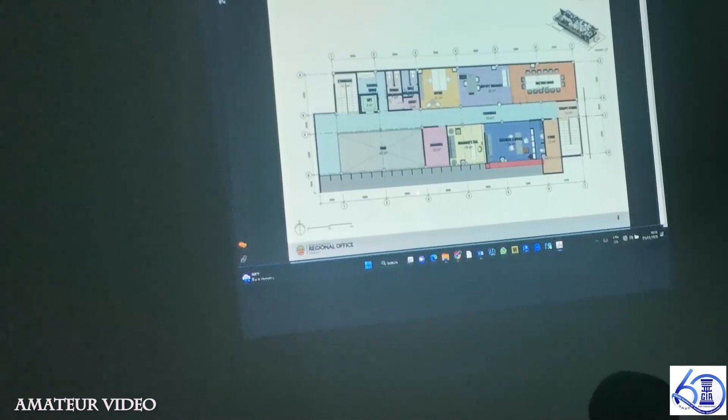But the elevation of this, the 3D, is beautiful. This is beautiful - it's not so acute in terms of the oscillation, and it plays very nicely on the eye. For me, when I look at elevations like this, I question the glass because I'm looking for where your mullions and transoms are likely to be.

So I'm asking, is there no horizontality to it? This is an exercise for facade design. The mullions and their location, and how the fins tie in with the mullion. Fins are integrated into mullion positions. So yeah, with the mullion, but then with the transoms.

In this design, there seem to be no transoms. Now what I question is, let's say you take this floor and what your spandrel here is, as if that is where your ceiling void is going to be. I know that it cannot be, because slab plus ceiling void is going to be where you can have the ceiling come. But because of the transparency of the rendering, it's as if the ceiling and all is part of that spandrel.

Right. But I mean, this elevation is stunning. It's so beautiful. I love this, and it's one of my best among all the shots. So seriously, as we said, congratulations to the team. This is more of a technical conversation we are having together, but we just have to say this is excellent. This is excellent, congratulations.

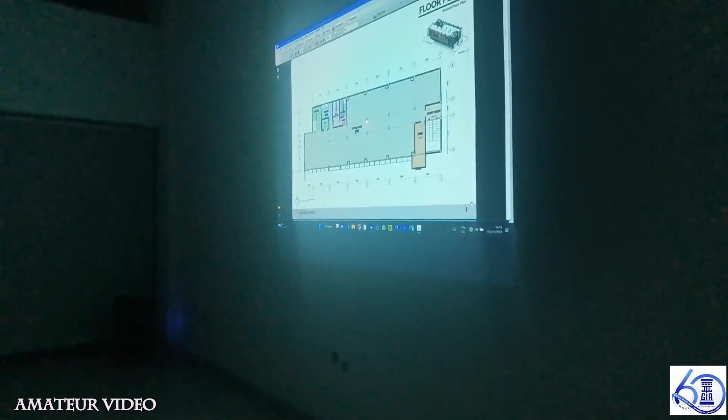These columns, I know the span. What is the span? What's the width of the building? It's 12, that's from here to here. 12 meters. I'm sorry, 10.5 from here to here. Really? Yeah, you can't, it's not 10.

So I think with 12, you can eliminate the columns. The columns are there, yeah, you're right. And then increase the length of the columns for the - yeah, you're right. We can easily keep one line and increase the span to 1 to 6 point something.

Okay, Phase 1: traffic on the ground floor goes to parking on the ground. Then there's the pedestrian access which leads you through this archway garden to the reception.

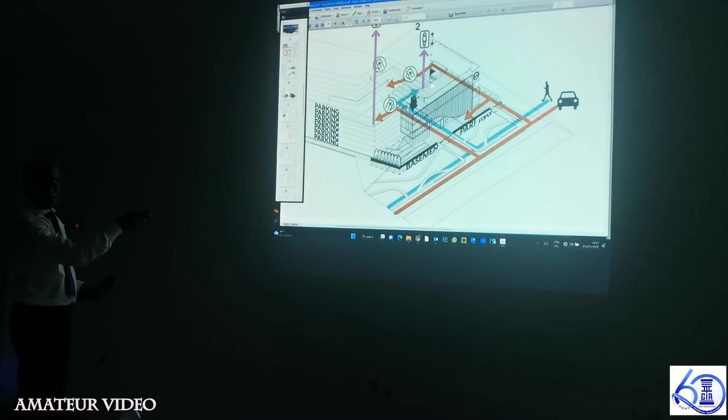Yeah, okay, so this is the second access point. Is that it? No, it goes into the reception. Mind you, the reception is joined to the tower when the tower comes. But for now, for Phase 1, it's going into that reception.

And at that level, there is a connection between this building and Phase 2, so all reception can be handled at this level. There's also a reception after the structured parking as well, in Phase 2, you understand?

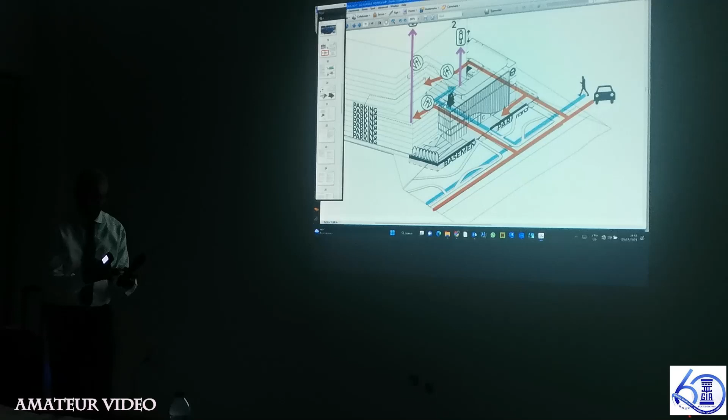So this reception here, the client was clear that there's going to be a connection between the two, and therefore this reception is conjoined to Phase 2. So it's at that location, so that you, as a pedestrian, you come in, and that is where you'll be attended to, you get as a reception.

The first entry, yeah, it's as you go to the back of Phase 1, that turn there is extremely abrupt. If you look at the drawing, this is schematic. Let's check it, it's almost about 7 meters.

I think we can check it very quickly. I think that is straightforward. Put a software and that shows the 10, and we can always adjust. But look at it, measure it, it's very wide, wide approach. Yeah, it's very wide, that's 7.7.

There was a good schematic of it, it's not true. It's that way and this way, where you come out from. Let's say, so that way it works.

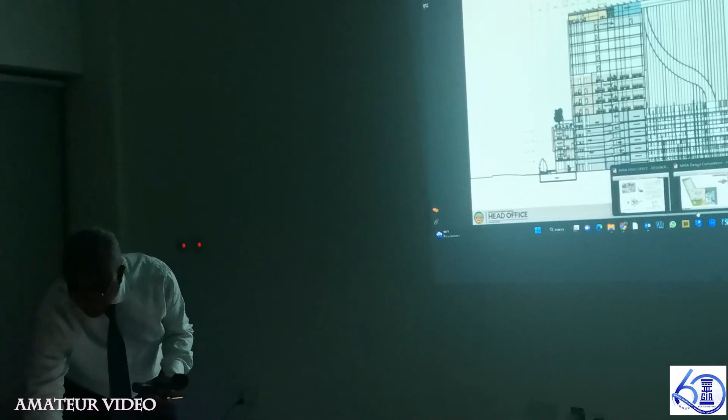I wanted to hop on this drainage. This is something that is dear to my heart, and I like the way the coordinator helped on it, because all the sites here have flood problems. And the N1 itself, when we finish, this rainy season will be a test to see whether that problem still occurs.

Now, the property here, what they have done is they put a pipe in the ground and closed it off. And because it was poorly designed, it creates a backing of the water, floods that. And all the other properties must drain themselves properly into the Jolo Stream. So there's something that came to me, and I think I want to share this knowledge.

We're just doing a building for WICAP, the West Africa Reinsurance, at the airport. And we went into the code and realized that it is now a requirement, of course subject to the code being ratified and put through, but it's now a requirement that if you put up a building, you must have retention of stormwater outside, equivalent to the roof and hard surfaces that you have put there, to help mitigate the flood problems we're having.

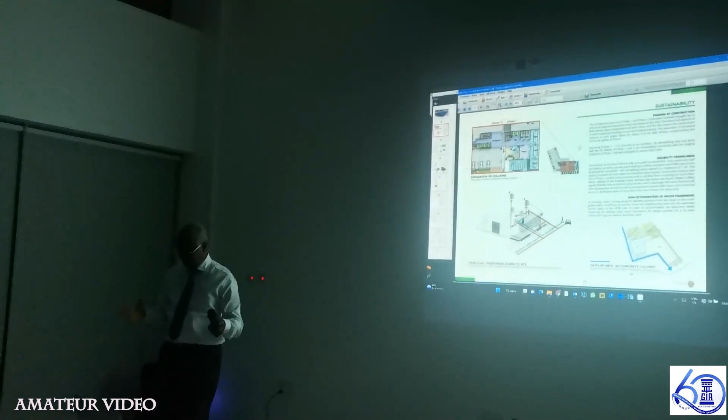And we calculated the size of storage that we must have and where we must have it. The cost is not easy. So let's all be mindful of this thing. The site is in a location where there's a flood problem.

It's opposite the Ministry of Foreign Affairs, somewhat at the Patrice Lumumba, Amilcar Cabral junction there. And last season, the videos of the floods were terrible. So we are committed to designing that retention that is required to mitigate. But the neighbors, right next door, is a Turkish developer doing two towers of apartments, and engaging with them is hell.

Now, how do we alone do this if others haven't done it? So this is a dilemma. And the municipalities haven't gotten wind of this, but when they do, anytime you walk in there, this will be a problem.